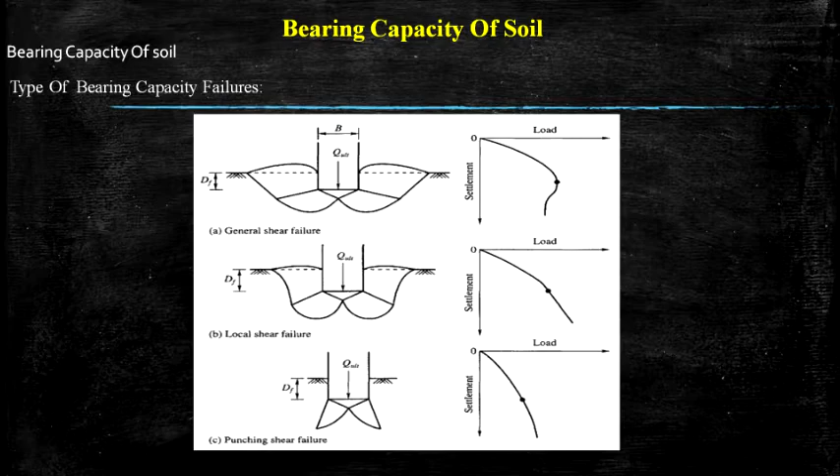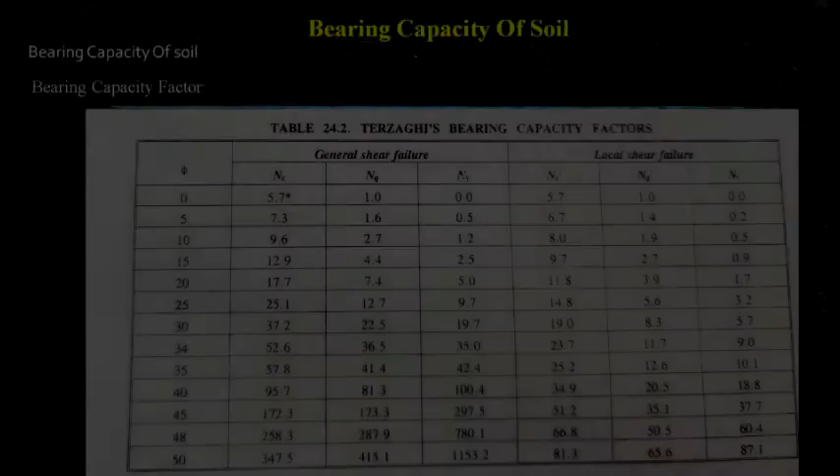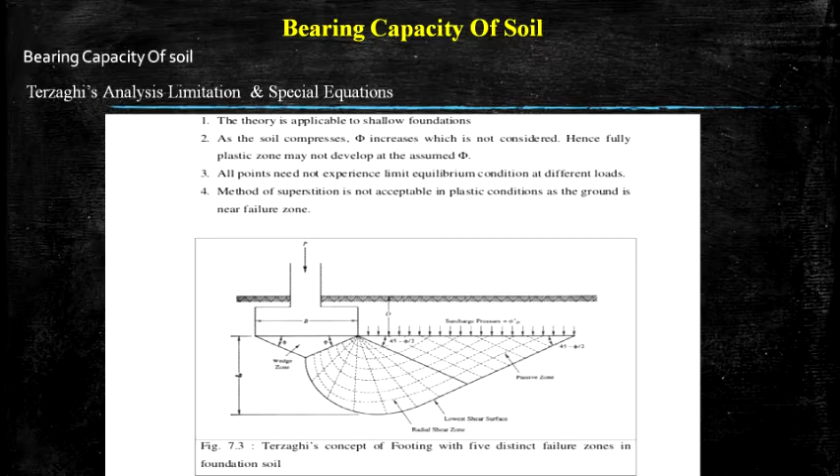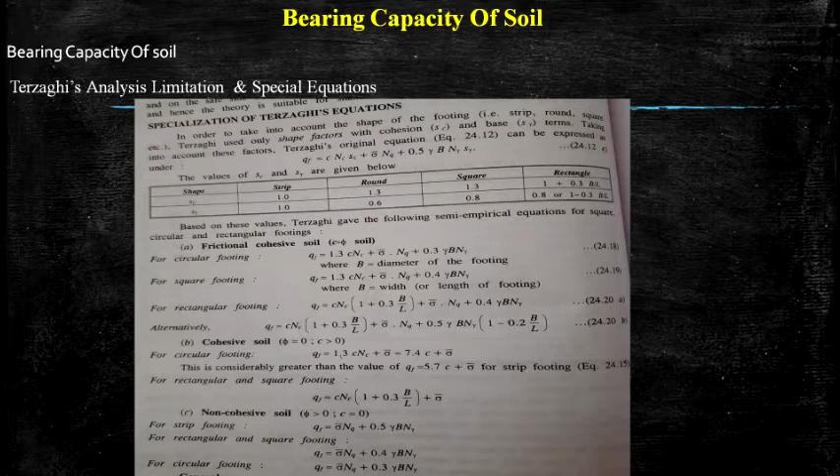And for rectangular footing the formula will be QF equal to C NC (1 plus 0.3 B by L) plus gamma D. And for non-cohesive soil, where C equal to 0 and phi greater than 0, the formula of strip footing will be QF equal to gamma D NQ plus 0.5 gamma B N gamma. And for rectangular and square footing the formula will be QF equal to gamma D NQ plus 0.4 gamma B N gamma.